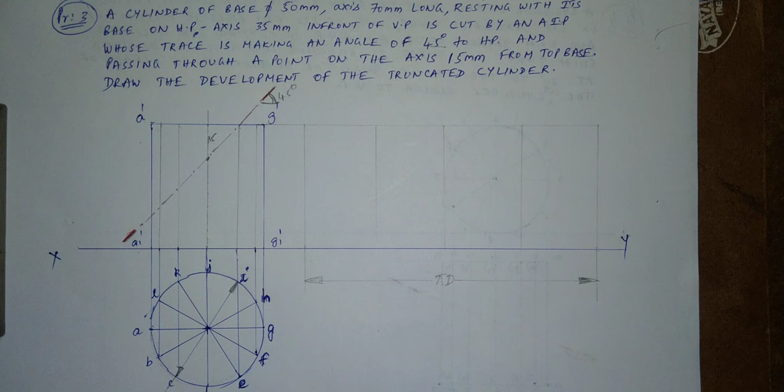Right guys, we'll just pick up from the last problem which I've done in the last video, that is development of surfaces 2. Now I'm just moving on to the cylinder problem. Since you have done enough of prism problems and pyramid problems, we'll move on to the cylinders problem in the development of surfaces.

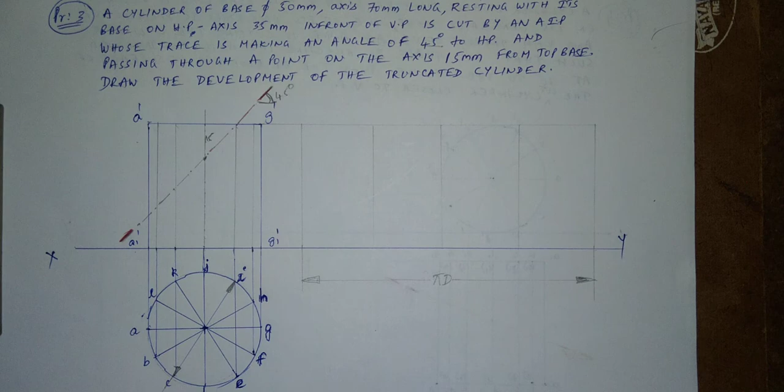Alright, please go through the question here. It's a cylinder of base 50 mm diameter, axis 70 mm long, resting with its base on HP. Axis 35 mm in front of VP, cut by an auxiliary inclined plane whose trace makes an angle of 45 degrees to HP. I think we have covered this thing, so I'm just quickly rolling off.

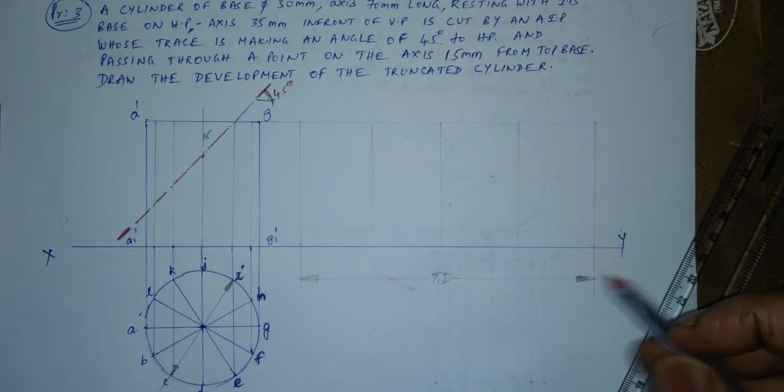Right, and this is your section. I'm just putting it with a section red line, so just so that you guys will have it. This is your section making 45 degrees to the HP, or to the XY line. Now, this is 15 mm from the top base.

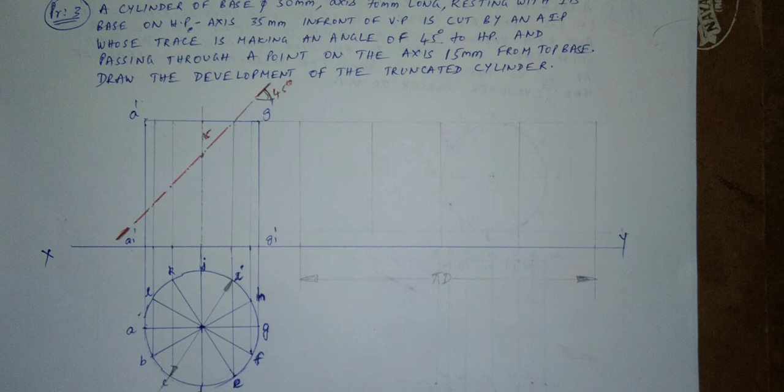Right, now let us find out in how many points this section is cutting the solid. Okay, this would basically give us the developments. All right, now before that, we want to develop out the surface. The surface will be developed out to basically 2 pi r, or pi d.

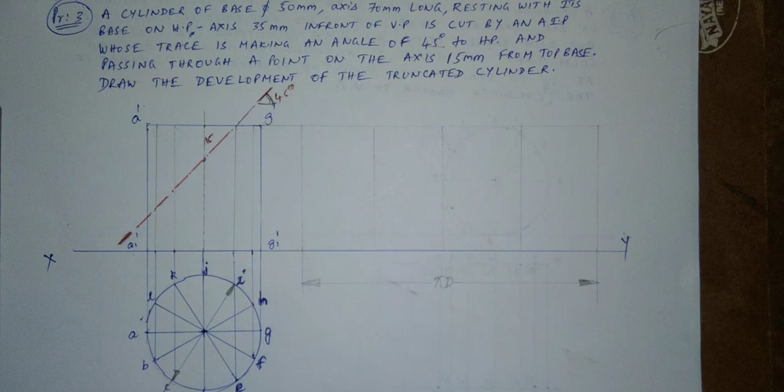From here till here, this is pi d. It's developed out. Now I've divided my circle into parts, I'm just sliding this a little bit upwards just so that you can have a better visual here.

Right, now this is my XY line, and you have your cylinder's front view projection. This is my front view projection. I have my A dash and G dash, these are basically the two extreme ends. This is A's projection, A dash, G's projection, G dash.

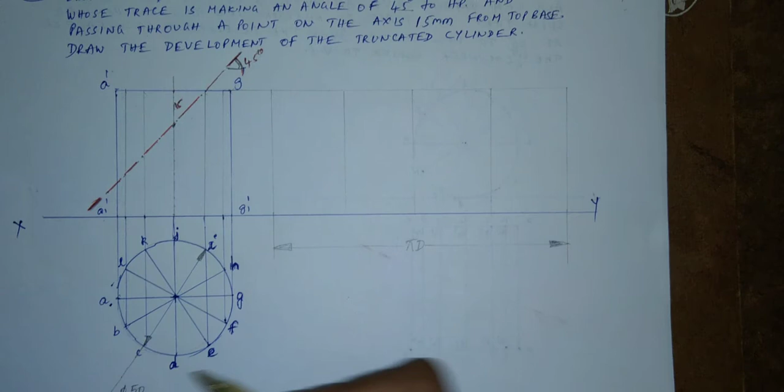Similarly, this is my front view, I'm seeing from here. So I can basically see all this section till A till G, like all these lines will be seen as solid lines. Okay, since I don't have a long edge unlike the prisms, I'm basically creating some edges using my generators.

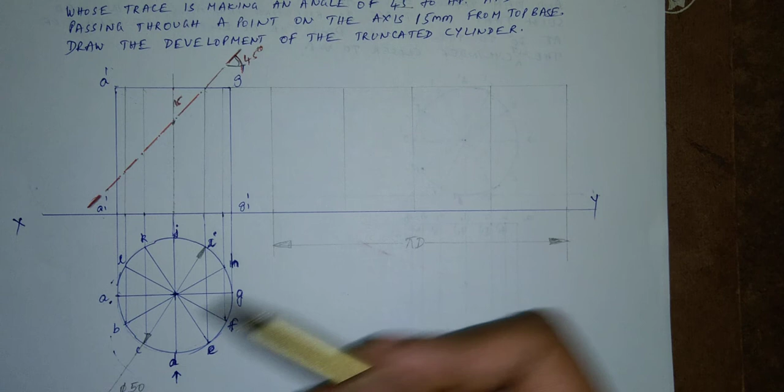All my generators, I've divided this circle into 12 equal parts, using one of those methods I taught in class. So you guys can divide that into 12 parts just for a nice smooth curve when we develop out.

All right, now this is like my B, so I'm naming that B dash, C dash, D dash, E dash, F dash. G dash is already here, H dash, I dash, J dash, K dash, L dash.

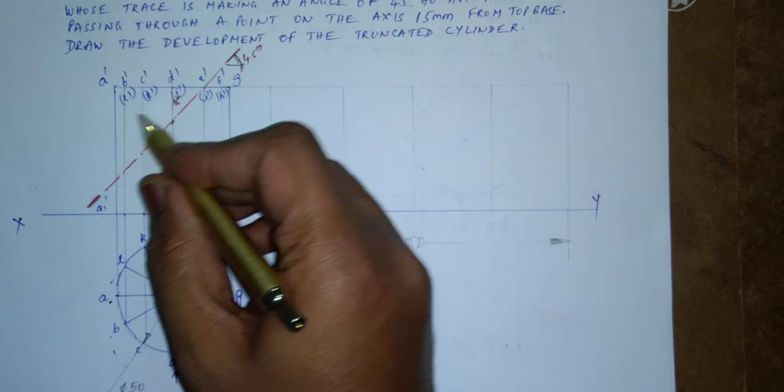Okay, these are the ones in braces, so these things are not seen. I'm seeing from here, like these are all the ones, from H till L, all these are put in braces. Okay, so now let us do the development here.

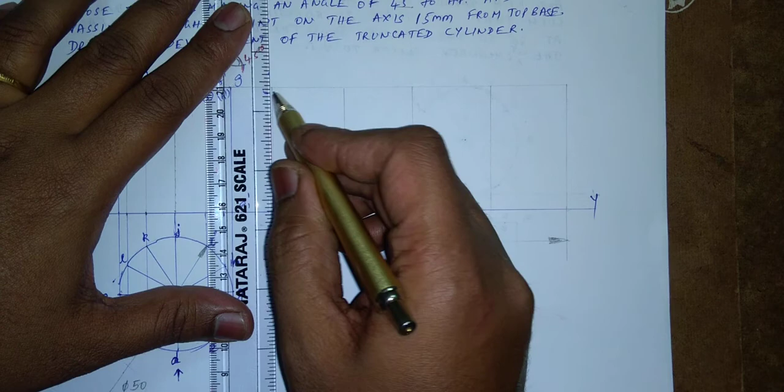So I've divided this part into, like, this is my outline. So this outline I can blindly draw it, I'm just putting solid lines here. This is my outline spread out. This is the development of the cylinder. Okay, cylinder has been developed out.

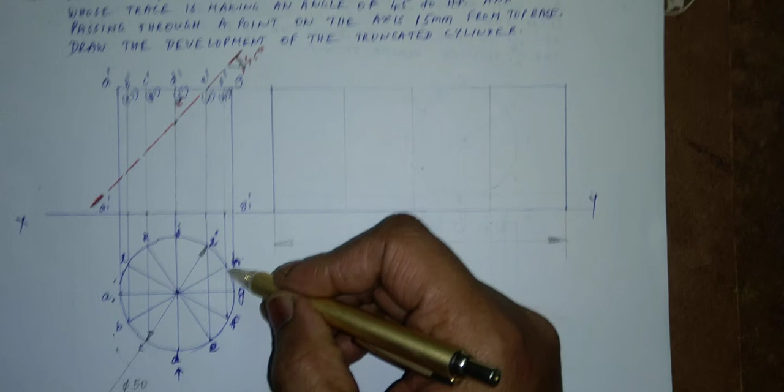This length is like 2 pi r, or pi d, pi into d, diameter of this circle, and then into pi is whatever this spread is. So this is an arc length, and this is the linear length spread out. So you have r theta, r into theta gives you the linear length of this small chunk. The same concept is used here to develop it out.

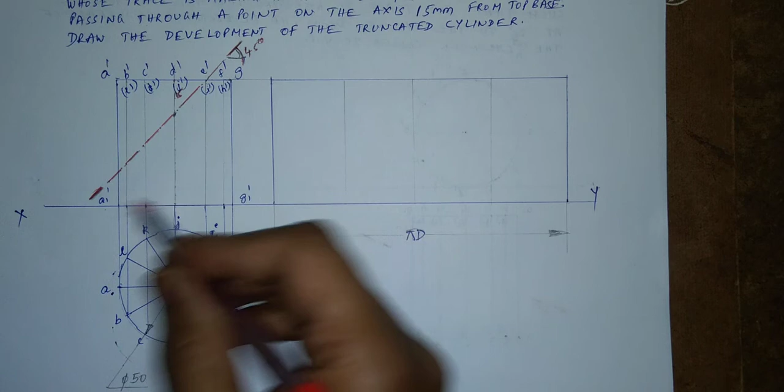Now let me get the points where it's cutting. So here, this is my number one, these are 12 parts, and then lateral surface I have 12 parts, but how many points it's cutting in is what's important for us.

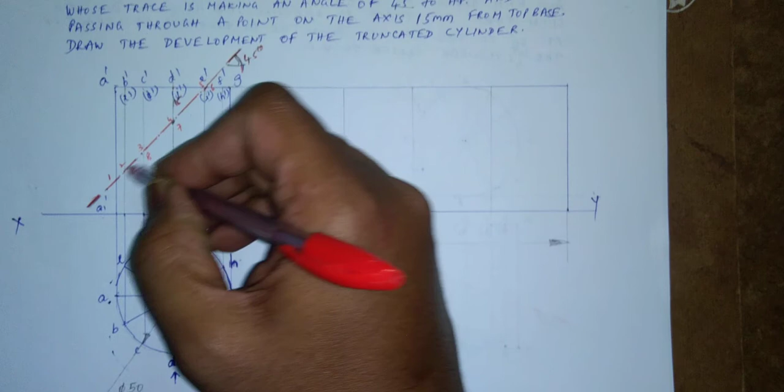So this is my number one solid line, number two solid line, 3, 4, 5. Since it's cutting the base, 2 points, one here and one on the other side, 6 on the other side, 7 on the other side, 8 on the other side, 9 on the other side. This is basically cutting in 9 points, right?

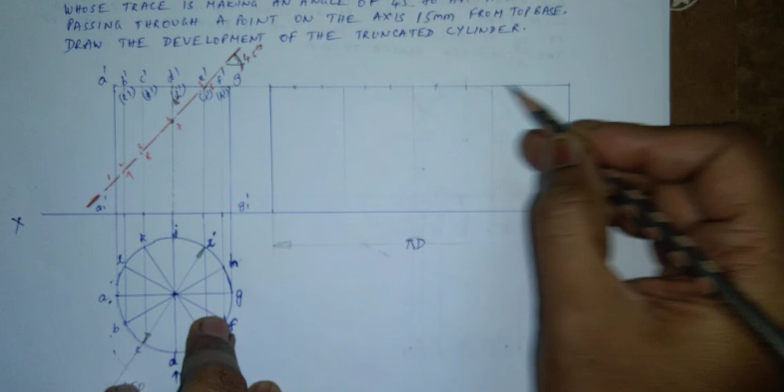Now let me just get the division of this one. Like, this is approximately dividing this chunk into 3 equal parts. Similarly this one into 3, similarly this one into 3, similarly this one into 3. So this will basically give me, so I'll just quickly draw the lines for you here.

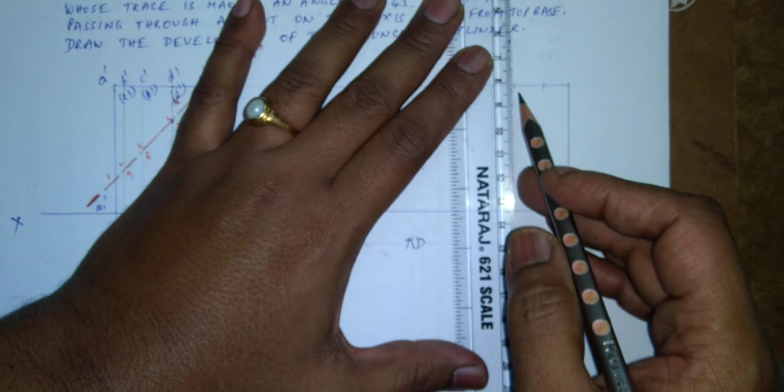So this is basically the development of the cylinder. I'm assuming that I've divided that circle into 12 parts and I have 12 generators. This is what I'm assuming.

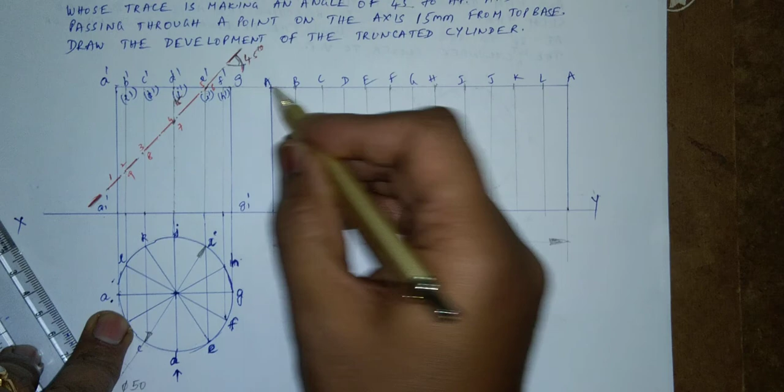So starting off from here, I'm developing it, opening it from here. So this is my A, B, C, D, using capital letters here. H, I, K, L, and A again, the last point. A starts and A ends. Similarly, if you want to start B here, it will end with B as well, because it's a circle. It's a cyclic thing, right?

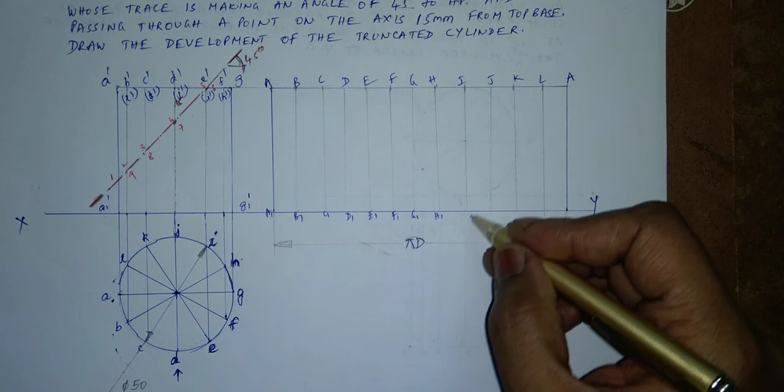Now, pretty simple. Now that I have all the 12 part divisions here, on the bottom I can say A1, B1, C1, D1, E1, F1, H1, J1, K1, L1 and A1 again, right?

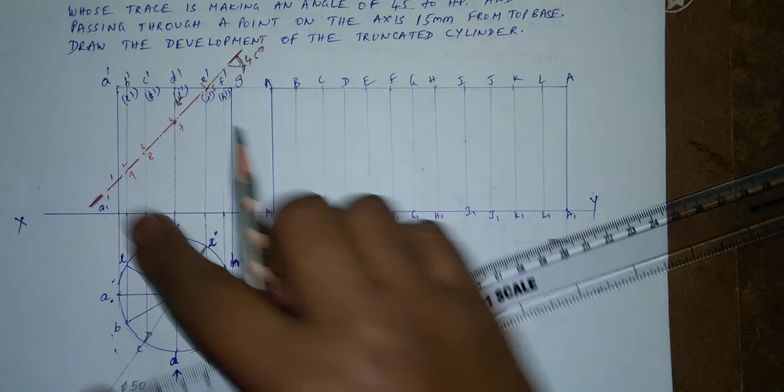Now all you have to do is just drop these lines here. One is on the A line, right? So straight away I'll just take this point from 1. I'll draw here, 1 is here, number 1, and 1 here as well. I'll use a red pen here, 1 and 1, right?

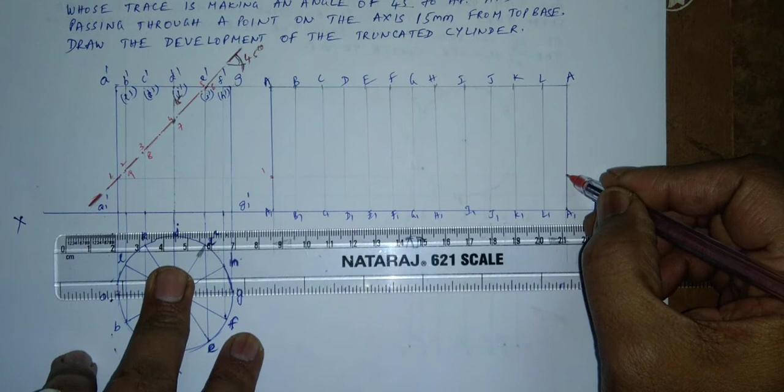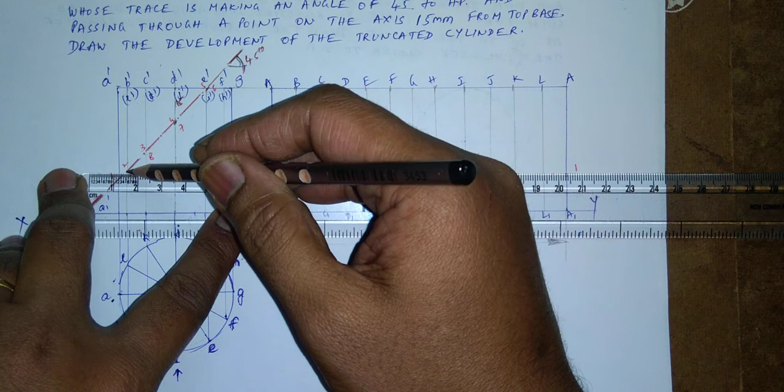First step. Now 2 and 9. 2 is on B line and 9 is on L line. So straight away I'll move this onto B line and L line. If I'm drawing the line like this, this is my point here and here. This is my point 2, this is my point 9.

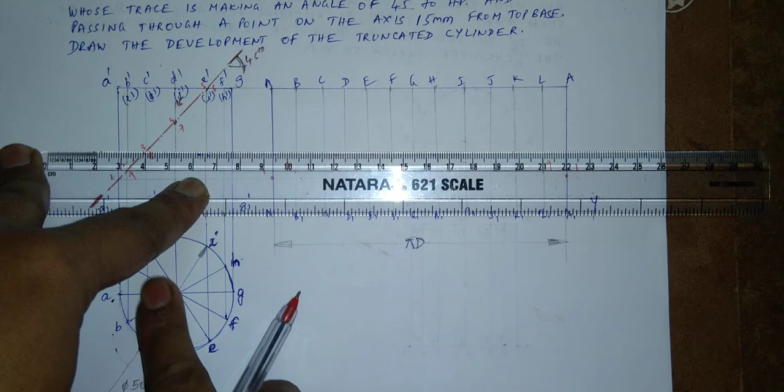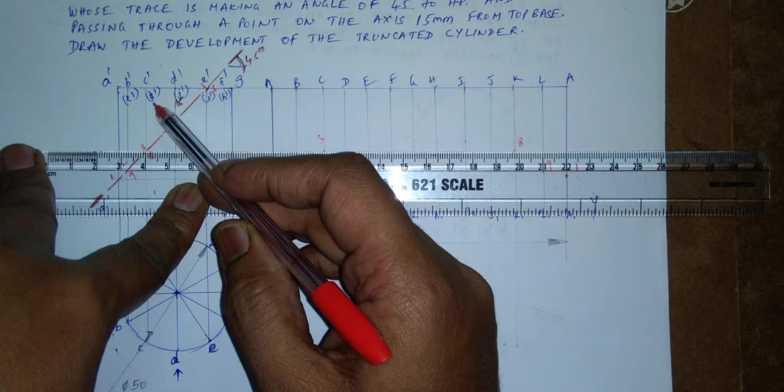Now let me go to the third point. Third point is on the C line, and the 8th point is on the K line. So this is my K line and this is my C line, my point 3, and this is my point 8. Pretty simple, 3 and 8 falling on C and K line. This is how you draw the parallel line.

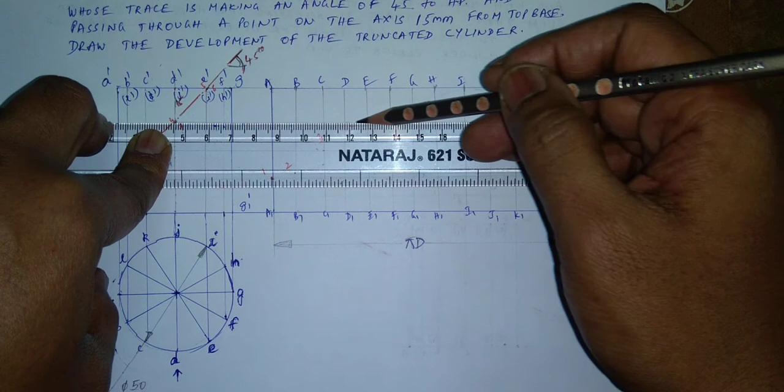Now 4 is on D line, 7 is on J line. So I'll move on to the D line and the J line respectively. This is my D line and this is my J line. So I am marking the points on the J line and the D line. The point on D is 4 and this is 7.

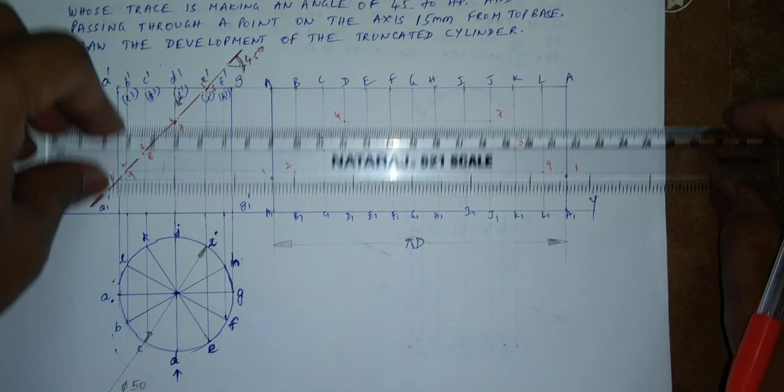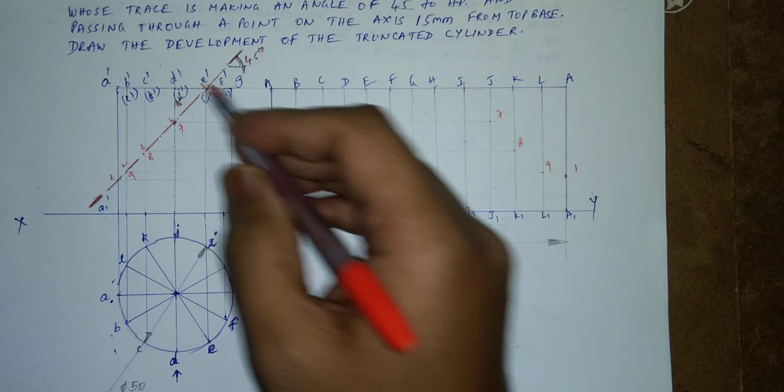Similarly, I have my 5 and 6. Where is my 5 and 6? 5 is on the E right here, and then 6 is on the I. This is on the top base, so this is my 5, and then on the other side this is my 6. Now all I have to do is just join these points.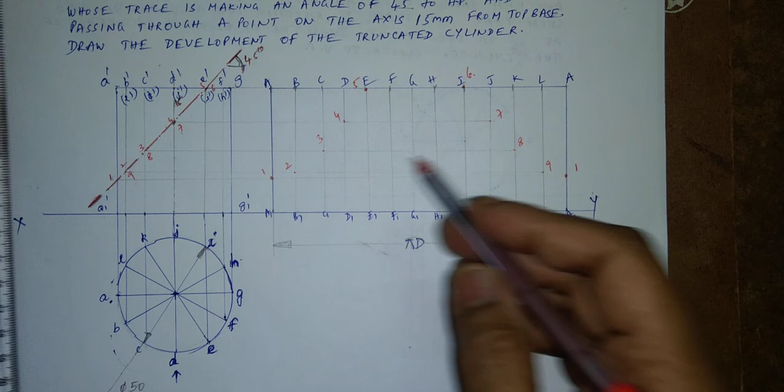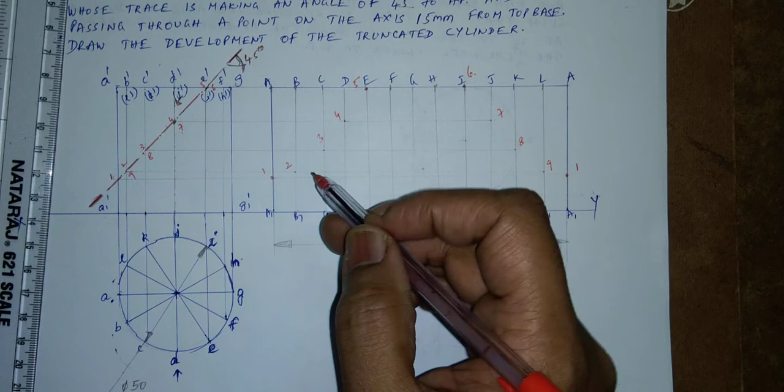Now since it's a circular surface, unlike the prisms, this one has a circular surface, so I'm not drawing a straight line here. I'm not using a ruler to draw a straight join between points. I need to use a small curve, one point at a time. Between 2 points, just try to draw the curve. This is also the same thing. Just join it out, form a curve.

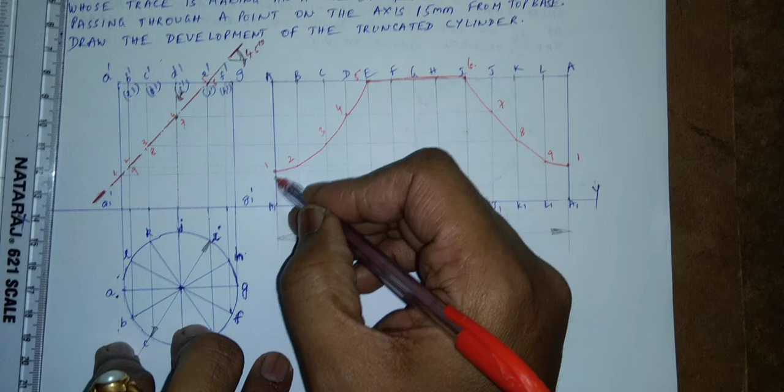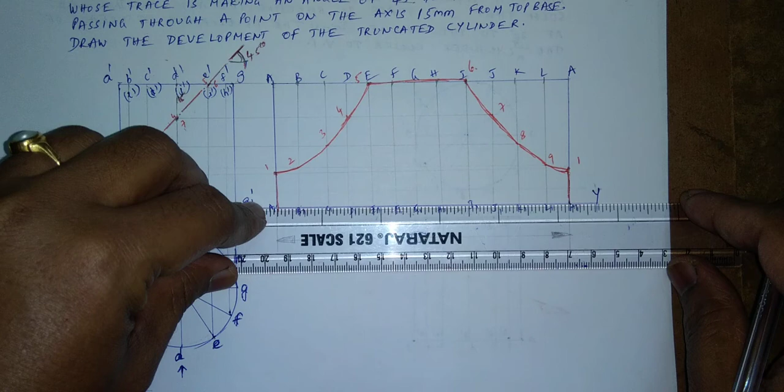This, of course, when it's developed out, will look like a straight line, and this is a straight line also. But this curved surface is basically a curved surface. It should look like a nice smooth curve, cut out from a cylinder. And this is also a straight line, so this also has to be drawn as a red line, since we are just developing this whole surface here.

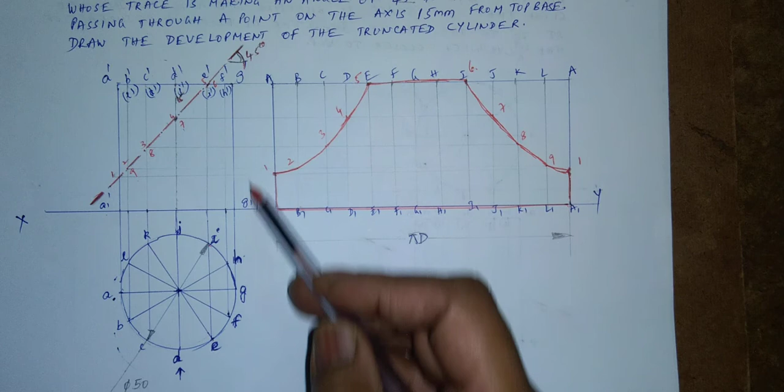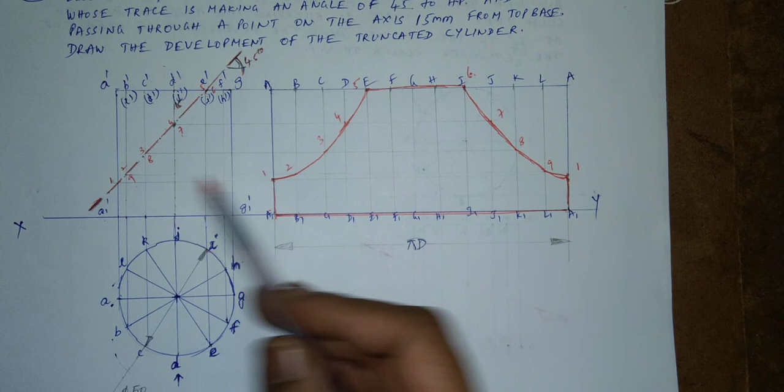This is the development of the surface of the bottom part. So this part is what we are developing out. This other part is gone. So this part from here till here, from 5 to 6, and then this remaining chunk E to I is remaining here, and then the whole of the base, and then from here 1 till 1. So this is your development of the surface of the cylinder which was cut out.

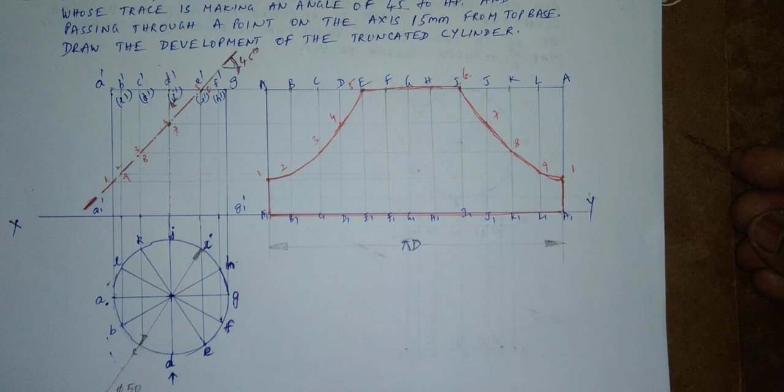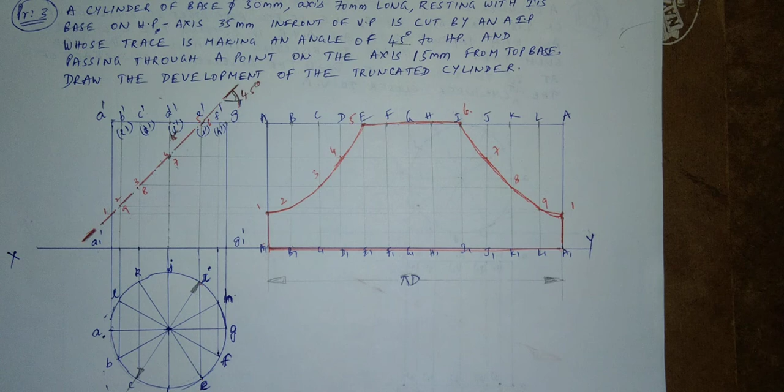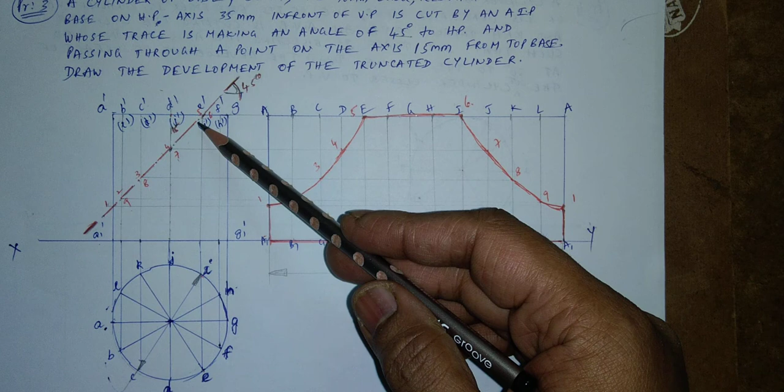So cylinders, pretty easy, right? The one thing which you have to remember is when it's cutting the base, obviously even if it's cylinders or prisms, or even pyramids, if it's cutting the base, it will basically cut in 2 points. Even if it's a cone, the same thing. So remember this point.